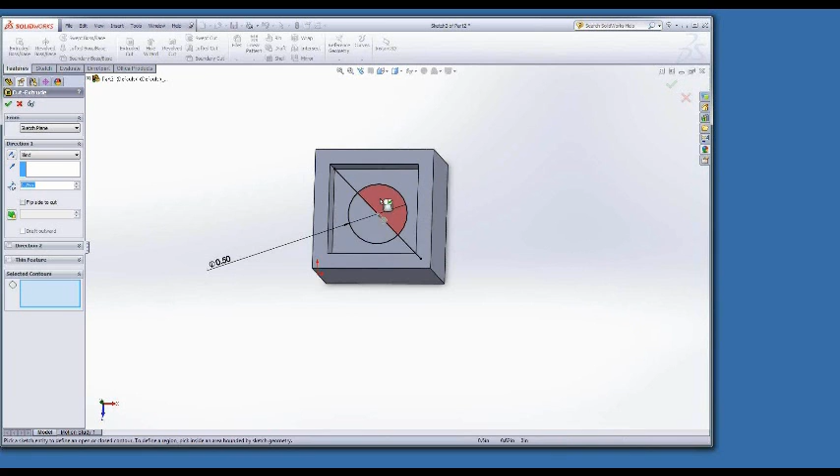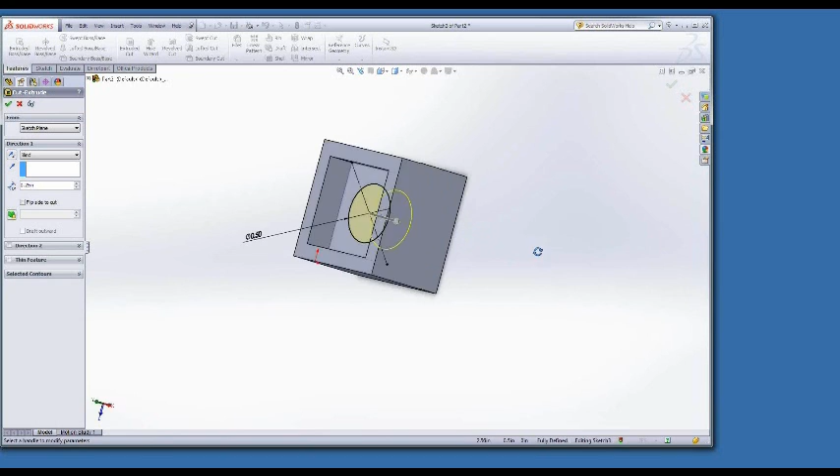I could do both as individuals, but I'd rather it just work the way it's supposed to. So I'm going to turn it into a center line again. Now it's dotted. And if I go back to that extruded cut, notice it's selected my circle, and it's ready to make it into a hole for me.

Now we have some options here with the extrude cut. Notice it comes up and says blind. With a blind cut, I can make that go through the shape as far as I want. I'll make it smaller so you can see the difference.

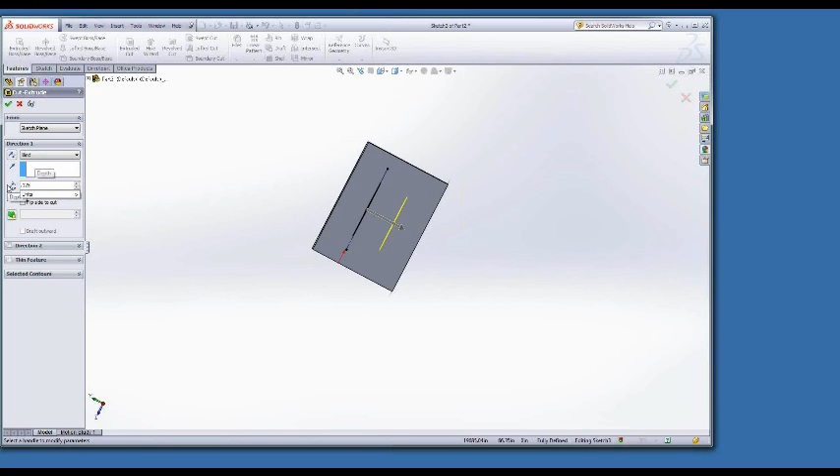Now see, it's only going to cut into there 1/8 of an inch. And if I go ahead and finish that off, I would just get this kind of shape.

What I would rather have had, though, let me just get rid of this whole thing. Now I'm back to my sketch. What I would rather have is that go the whole way through, though.

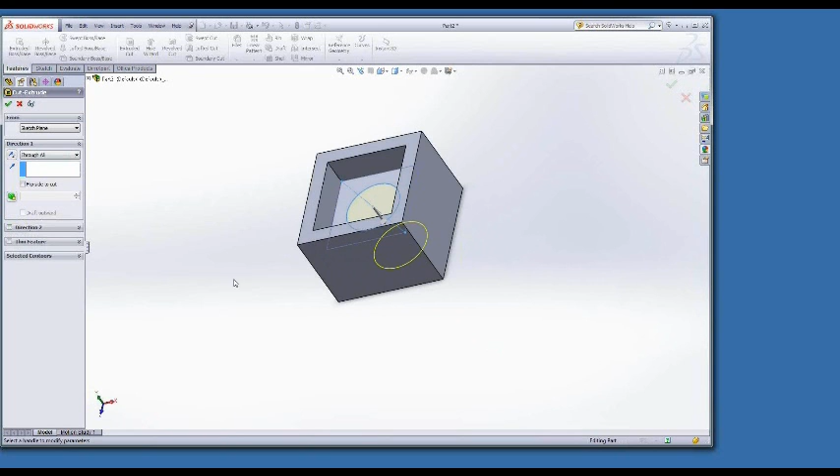So I'm going to go back to my extrude cut, and instead of blind, I'm going to choose through all. Now it's making a hole that goes the whole way through the part. Say OK, and I've got a hole through the part.

Okay, what do we think so far? Chime in.

It seems very similar to drafting. It is very similar to drafting.

Those of you who have done some drafting using AutoCAD will find that in AutoCAD it wants you to tell the program exactly how big you want to make something from the beginning. With a program like Solidworks or Autodesk Inventor, you can draw and then kind of shape it to the right size, and I think that's maybe a little bit more intuitive.

When you pick up a pencil and draw something, you kind of just draw, and then you make it fit the size you want. So it seems a little more intuitive to me. I learned AutoCAD first and had to unlearn some of that when I started on SolidWorks, but I found it easier, and it works a lot like Inventor. So those of you who like AutoCAD and the Autodesk products, Inventor works very similar.

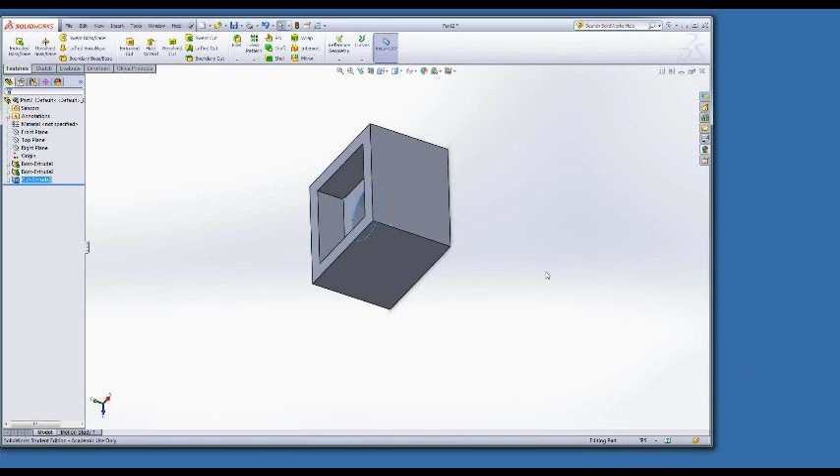Okay, let me check my list of other things I want to make sure you know how to do. We've done offset, we've done center line. Let's do some complicated geometry on one of the sides here.

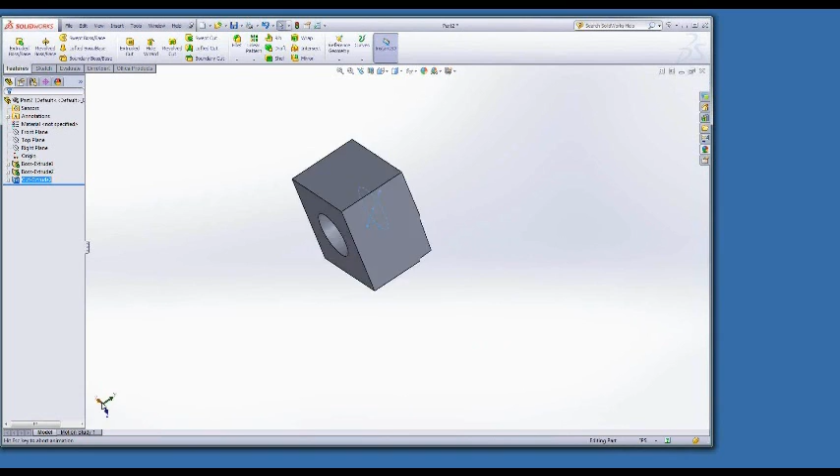I'm going to do this just to kind of shape it, and let's do a sketch on this face right here. I'm not going to worry about how precise I am. Let's just draw a circle. And in fact, let's draw a bunch of circles.

Notice when I did that, it allowed me to line it up right underneath. I'm going to also do one that's not lined up, and I'll make this one, obviously, a different size.

Something else this program will let you do: I've now got three circles on this shape. I'm going to select them, holding the Shift key, 2, 3. And I would like them all to be the same size. So if you look over here under Properties, one of the things says Equal.

I'm going to go ahead and click Equal. And now it has changed that last one, which was bigger than the other two, to the same size as the other two.

This is really handy if you're making a bunch of screw holes in something and they're all going to be exactly the same. You can just select them all and click Equal. And then if you find that you need to change the size, it'll change them all at the same time.

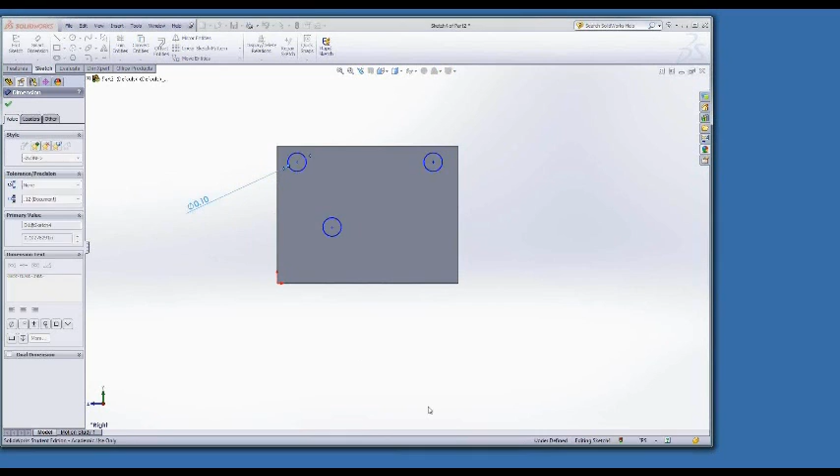That probably wasn't the best choice because I'm outside my geometry. So let me—how about we make that, so that's a radius, that's a diameter, notice the difference there.

We'll make it 0.0625. Didn't like that. Okay, what am I doing wrong?

I guess it's fixing the diameter. This is how I have to change it apparently. Yep, sorry. There we go. So once I've given that dimension, I can't change the circle, I have to actually change the dimension, and then everything will work.

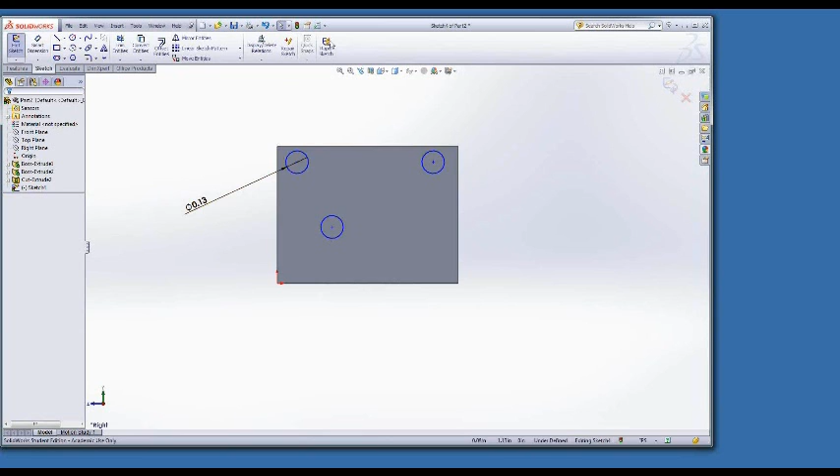Okay, so now I've got these three holes. Let me get rid of this one. I'm going to show you. And I want to put these two holes, move them to another spot.

So I'm going to select them both, and I'm going to go up to Move. For Move, I've got a couple options. I can either move it with a from and to. With from to, I say start right here and move it to right here, okay?

Or I can unselect that, sorry. Or I can move and use a fixed X and Y distance. If you're doing something very precisely, this is probably what you'd want to do. So I'm going to go ahead—that looks pretty good. How about move it a half inch down? And we say OK, and now my holes have moved a half inch down the part.

Okay, so move works exactly like you would expect move to work. It does exactly that—takes whatever you've selected and moves it. There's another option under move, which is copy. Works the same way, but when you do this, it actually leaves the original one and creates a second group, just like you'd expect.

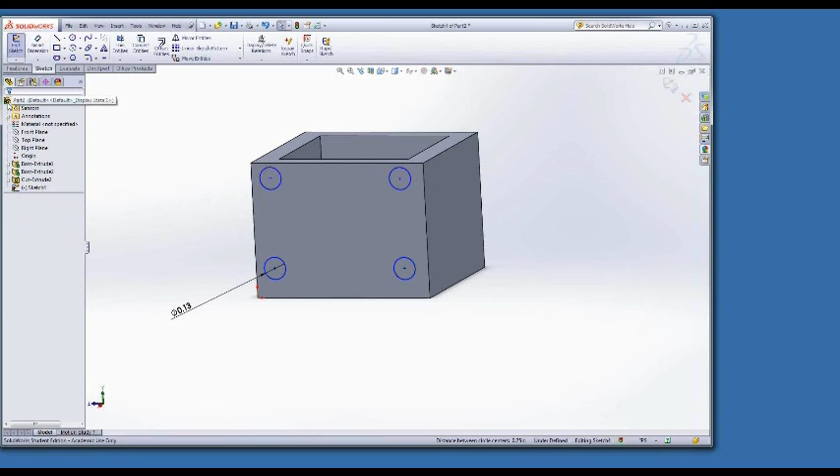Okay, and then let's have some fun with that—how about we cut those through the part? We'll go through all. Okay, and now we've got holes that go through. Notice our holes went through the side walls, so now we have that kind of filleted looking shape.

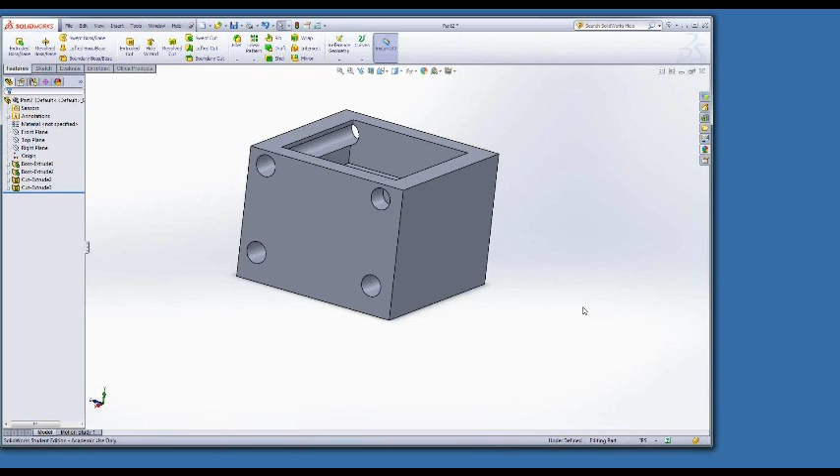Okay, too fast, too slow? Anybody? All right, must be just right. No, but I'm not hearing from anyone. Yeah, just right.

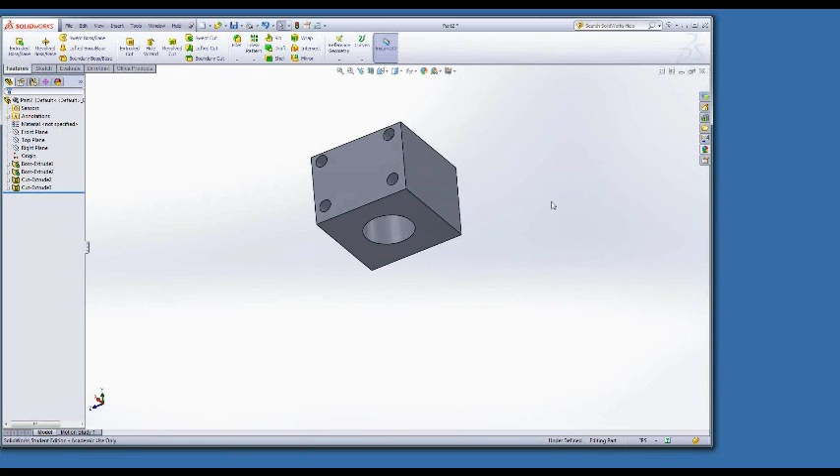Okay, then let's do something with this. Let's go ahead and save this as a part. So I'm going to go File, Save As, and what we want to call it, we'll call it...

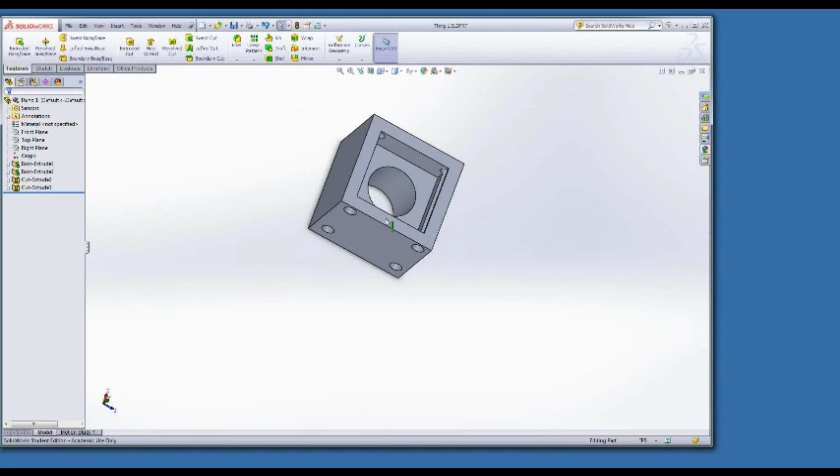Thing 1. I'm just going to put everything on my desktop there. Works. Okay, now I'm going to go ahead and close this. I've saved it. Go back to my regular screen, and let's start something new.

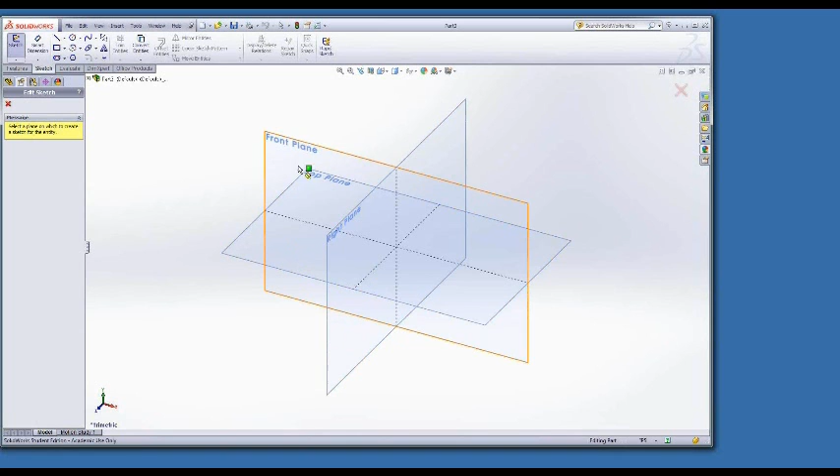New part. Okay. And now I want to just make something to attach to that other part we just made. So I'm going to go—what did I do last time? Did I do the top plane or the front plane? I think you did the top. Okay, let's do the front plane just for difference, so you can see that it works the same way.

And I'm going to make a circle. I would like my circle to be the same size as that hole, and I think I made that a half inch diameter hole, I believe. Yeah, I believe it was a half inch. So I'm going to say 0.5.

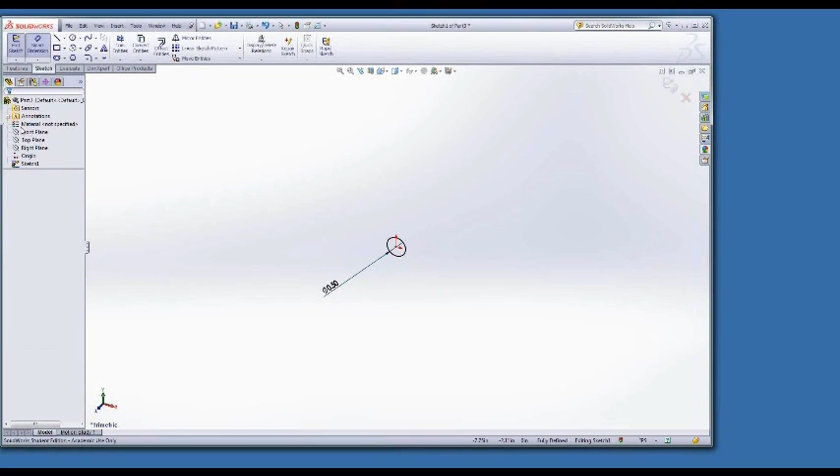Okay. Feature extrude. And let's make an axle here. We'll make it, how about 8 inches. Okay, so just that simply, we now have a rod.

Okay, so then I want to call this, save as, thing 2.

Okay, so now I've got two things. I want to stick them together. So I'm going to go to File, and I want to go to Make Assembly from Part. When you do that, you'll get this window that allows you the choice of either making an assembly out of thing 2 as being the main part, or I could choose thing 1 as being my main part. I think I'll go ahead and keep it thing 2.

Okay, and so then if I go over here on the screen and click, it's going to put my part on the screen.

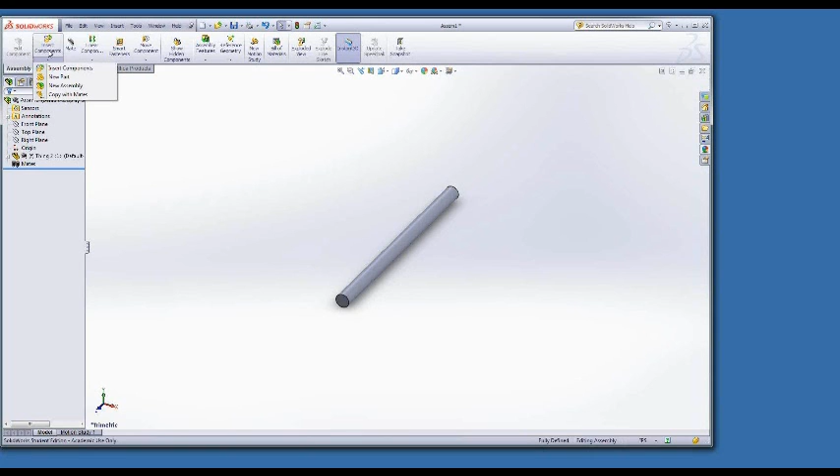Next, I want to bring my other part into this assembly. So I'm going to go up here and insert a component, and I'm going to insert my thing 1. Now notice thing 1 was drawn in the top plane, so it's kind of sitting in the wrong configuration to add to my axle, but that's okay.

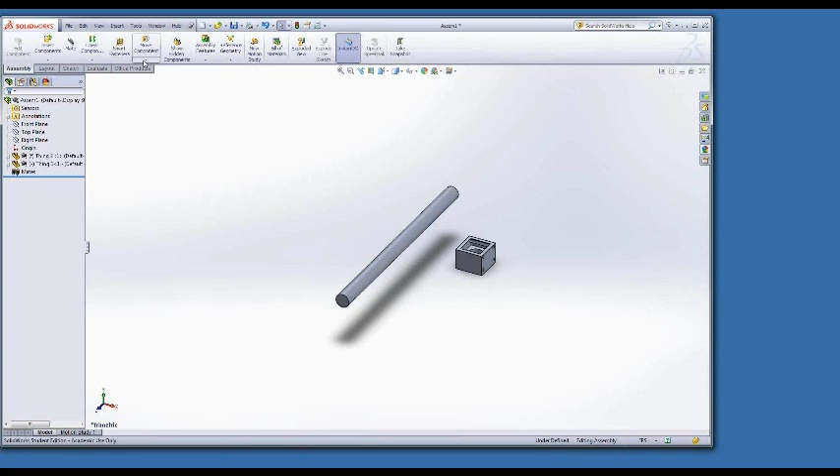So I could do a couple different things. I could either go to this rotate component just to get myself closer. I'm going to go ahead and do that. And it doesn't matter how exact we are because we're going to use a command that gets us exactly what we want in a second.

And that's fine. Here's the real beauty of using a solid modeling piece of software. If we want to create a complicated system like a robot, all you need to do is make all of your individual parts, or I'll eventually show you that you can download all of the individual parts from the web, from the kit of parts, or from different sites like McMaster-Carr.

But then we're going to put them together using this little paperclip thing called mate. Okay, so I'm going to go ahead and choose mate, and it's going to allow me to put these two pieces together. I obviously want this axle to ride into the bearing surface of this.

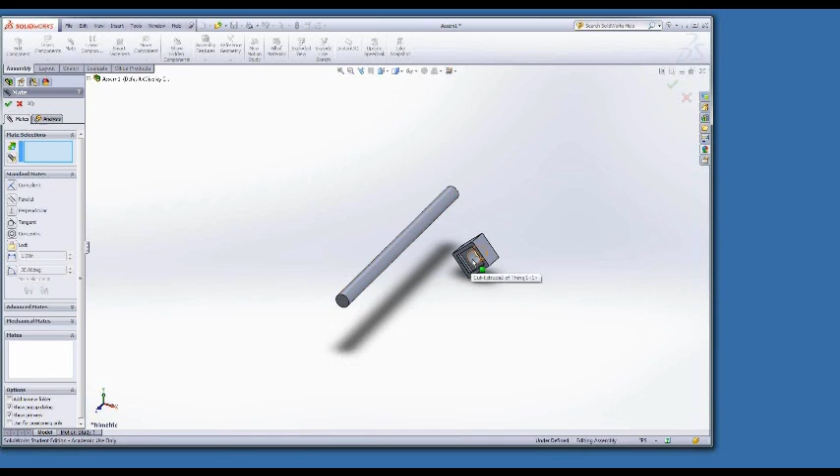So the first thing I'm going to do is I'm going to click on the surface of the axle, and when I do, it shows face here, and it has highlighted the entire circumference face of this. The next thing I want to highlight is the face that I want to mate it with, which is right here. And so when I do that, it kind of puts them together. That's what I wanted. So I say, okay.

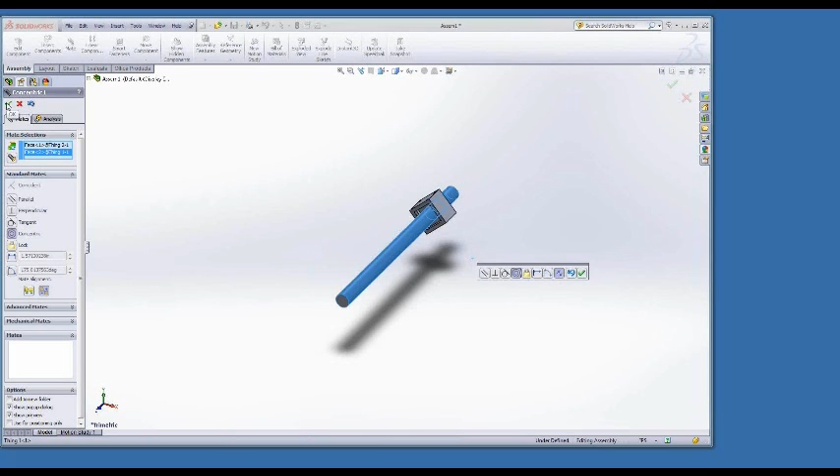And now they are kind of conjoined. I cannot take that part and move it out. I can go ahead and spin it, and I can move it back and forth, but I cannot remove the face and the face that are connected together.

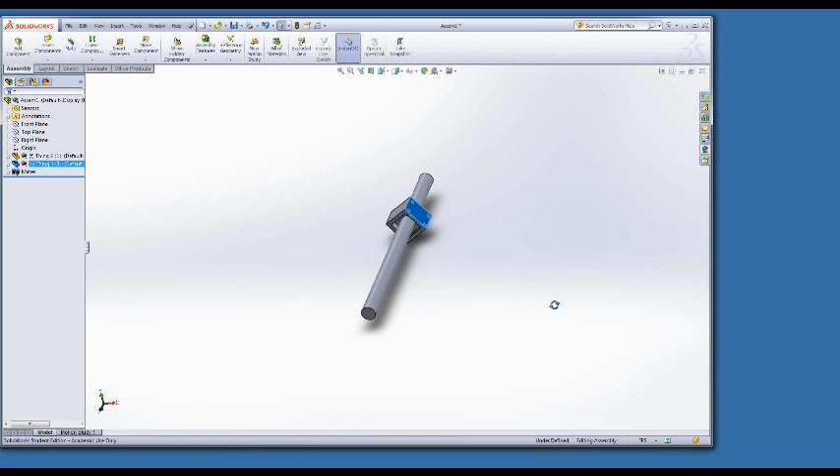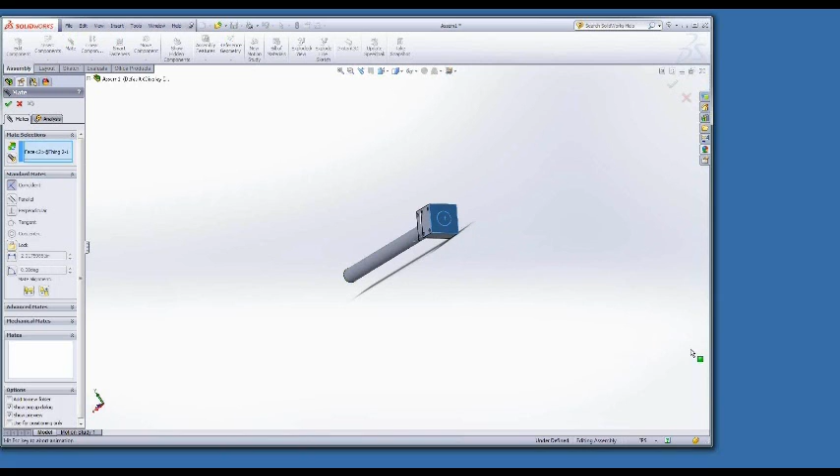And if I want to go a little bit farther and define that a little bit more concretely, I'll do another mate. Now let's say we take this face, oops, I had a face already highlighted, which I didn't want, so I'm going to go ahead and get out of that and start again. Okay, mate, I'm going to take this face right here, and this face, and now it will line those up.

Now, if you have followed what we've done, this outer surface of the axle and the inner surface, the bearing surface of our first part, are mated together, so I can't move them apart. And this end and this end are mated together, so I can't move them apart.

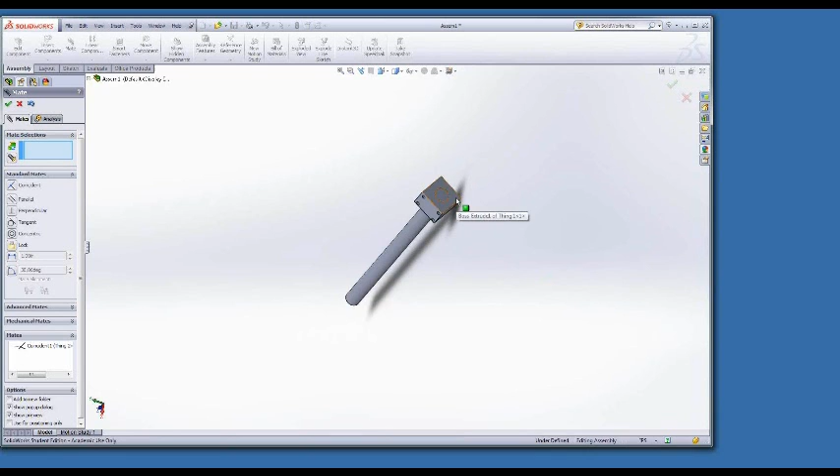But I can still, one more click here, I can still spin. I can no longer pull this down the shaft, no matter how hard I try, but I can still spin it around.

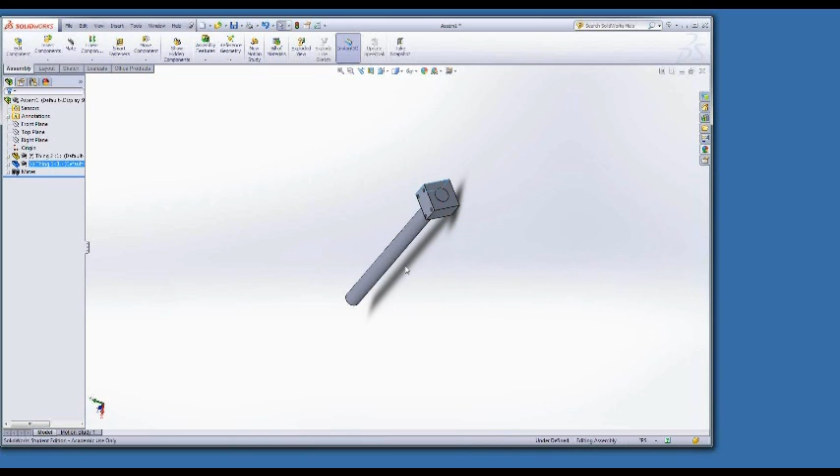So if we were going to attach this to something else, maybe this is like the robot carriage, this is my axle, and this is some type of an axle pin. Now my axle will rotate inside that bearing block, but it will not come out because I've mated it together.

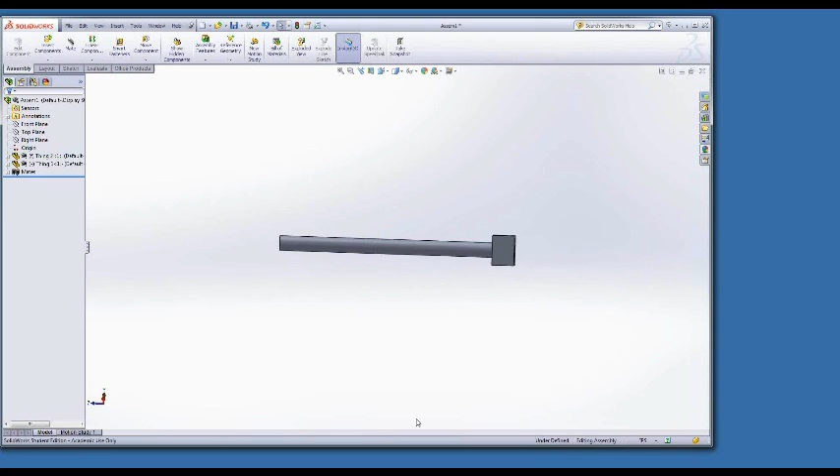Okay, seem easy so far? Yes. Is everybody drawing along with me?